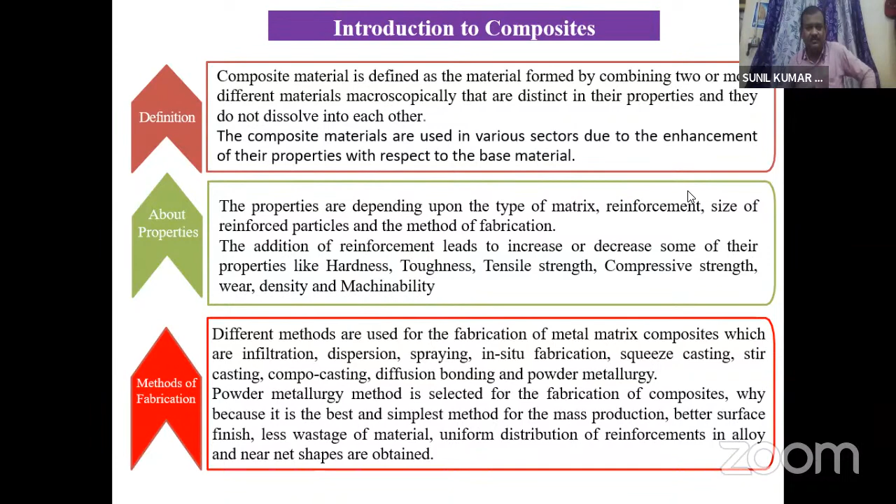Coming to types of composites, composite materials are of two types: one is matrix type, second one is reinforcement type. Different types of matrix can be used for the fabrication of composites, such as polymeric matrix, ceramic matrix, and metal matrix.

In polymeric matrix, there are two types: one is thermoplastic and the second one is thermosetting plastic.

Coming to ceramics, various ceramic materials can be used for the fabrication of composites as a matrix material. Some examples are glass, alumina, silica, etc.

Coming to metal matrix, different metals can be used as a matrix. Some examples are aluminium, copper, tin, nickel, etc.

Coming to reinforcement type, three types of reinforcements can be used for the fabrication of composites. One is whisker, which is just like a fiber but a very thin layer, just like hair, and can be used for the fabrication of composites.

Then coming to fiber reinforcement composites. Fibers are of two types: one is continuous type of fiber, and the second one is short fiber. Coming to continuous fiber, based on the arrangement of the fibers, there is unidirectional and bidirectional.

Then coming to short fiber, these are randomly placed, or sometimes in the same line, aligned. So fiber composites are there. After that, particulate - that means particles can be used as a reinforcement. These come under particulate type reinforcement of composite materials.

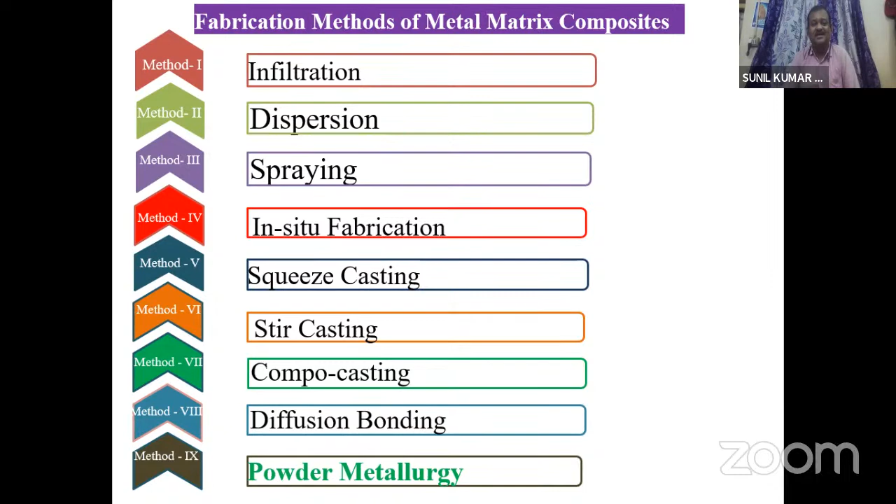Then coming to different methods: first of all, infiltration method, then dispersion method, spraying, in situ fabrication, squeeze casting, stir casting, compo casting, diffusion bonding, powder metallurgy. All these are used for the fabrication of metal matrix composites. Among all these, powder metallurgy is selected for the fabrication of composites.

Then coming to powder metallurgy method. First of all, powders are considered - different metallic powders are considered. It is the science of producing fine powders and then making objects from individual mixed or alloyed metal powders, with or without the inclusion of non-metallic powders. Different metallic powders are considered for the fabrication of composite by the powder metallurgy method.

This method involves producing metallic powders. Different methods are there for the production of metallic powders. Then blending them, which is also known as mixing of powders. After that, pressing or compacting the mixed powders into required shapes, and finally sintering the pressed green compact.

The compacted component is known as green compact. This green compact after compaction will be sintered to improve the properties. The final product in this method - the components are produced in their final shape by pressing the metal powders into the desired shape, then heating the compacted powder for a period of time. For different materials, we are going to use different temperatures.

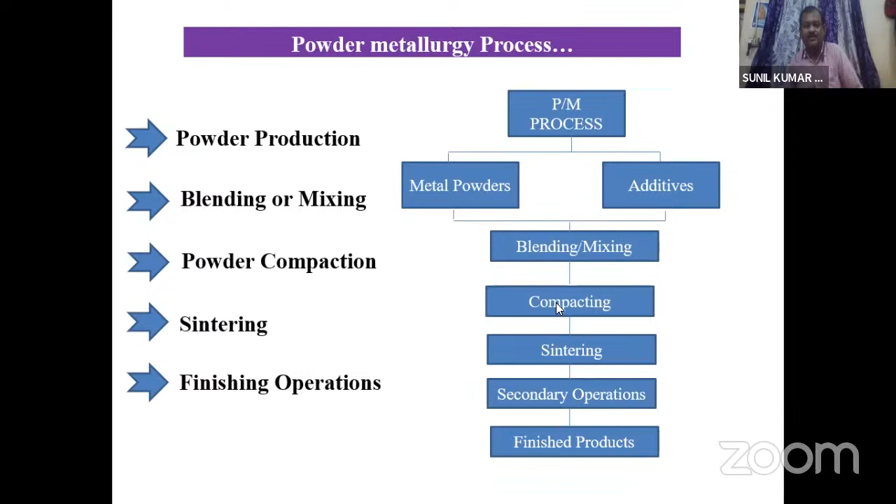Coming to the powder metallurgy process, first of all we have to concentrate on powder production. We produce powders by using different methods. Then this powder will be characterized, because size and shape of the particles may influence the final properties. Hence, the powder will be characterized to know size and shape.

With these powders, we are going to use a powder metallurgy method. In this process, blending is taking place. After that, compacting the blended powder, then sintering is taking place. Then forging and hot pressing are the secondary operations. After that, the final product will be obtained.

We are going to find the properties of the final product. Density or porosity, ductility, strength, and other properties can be found by using different experiments.

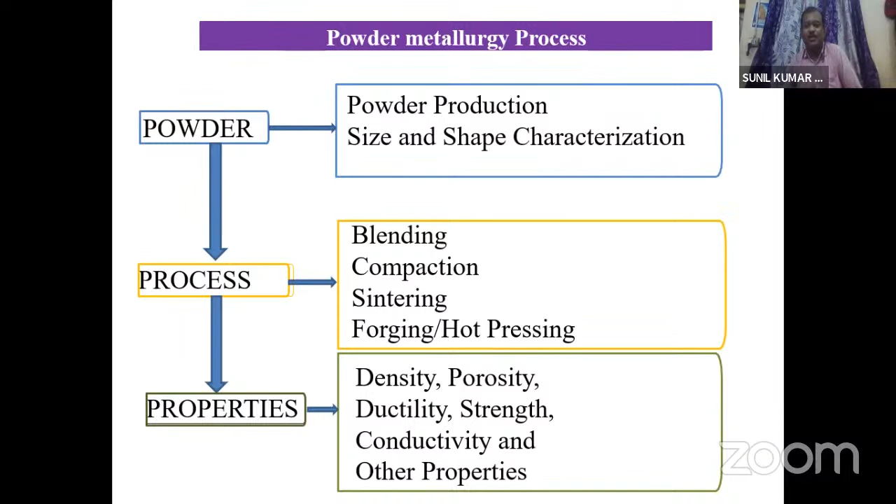Coming to methods of metallic powder preparation, we are going to produce different metallic powders. Nowadays there is no need to produce them; they are already available in our market. Online we can order these powders directly and get them. There is no need of producing metallic powders, but to know the methods of producing powders, these are the methods to produce metallic powders.

First of all, mechanical pulverization. In this, by machining, that means simple filing, we can produce different metallic powders. Then crushing, milling, grinding, etc. By using this, we can produce metallic powders.

Then atomization is also a process. Molten metal, if it is cooled, will be converted into different particles. Then electrolysis, chemical reactions, and shotting. These are the methods to produce metallic powders, but nowadays these methods are not required.

Coming to blending or mixing metallic powders: the process of blending and mixing the metallic powders in a required proportion. We are going to consider some proportions, and based on these proportions, the final product will give us the desired properties.

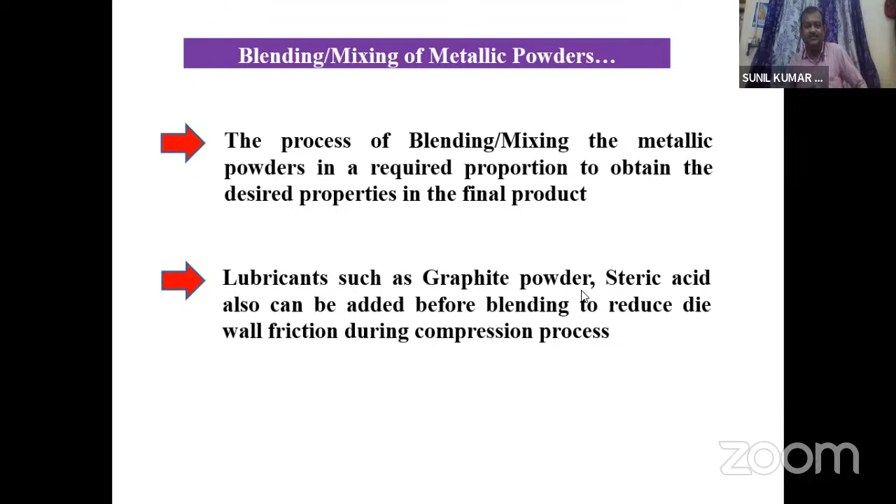Coming to blending or mixing of metallic powders, different methods are there. Among them, ball milling can be used for blending, or a mortar with a pestle can be used. Then an ordinary lathe can also be used for blending and mixing.

In this ball milling machine, inside there is a cylindrical chamber. This may be a tungsten carbide chamber, or sometimes a chromium chamber. Inside that, we are going to pour the blended powder, which we have taken proportionately, into the crucible in the cylindrical chamber. This cylindrical chamber is fixed inside the ball milling machine.

Once it is operated, balls are also included inside the chamber. Steel, chromium, or sometimes tungsten carbide balls can be used. Based on the chamber, we are going to consider different types of balls.

Once it is operated, because of this movement, the balls will collide. Because of the collision, the material will be blended. This will be operated only for a few minutes, 10 to 15 minutes, and that is sufficient.

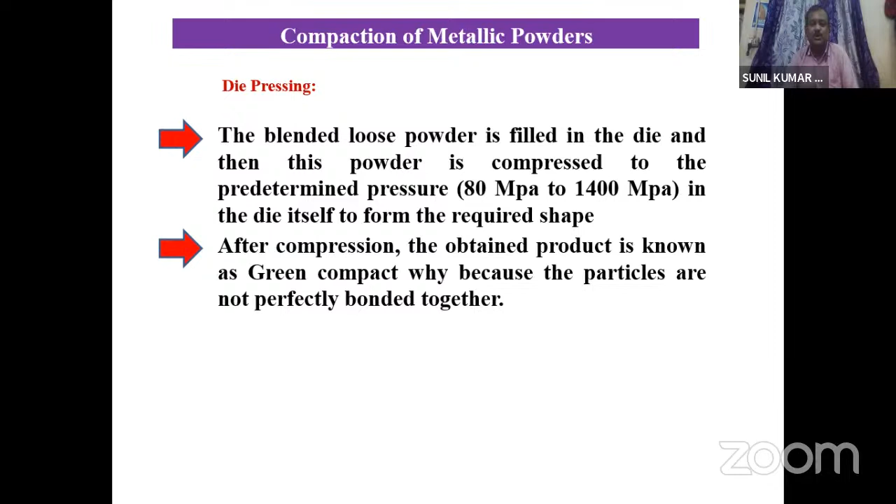So there is no bonding between the particles, hence there is no strength of that component. So to improve that, we are going for the next operation.

Then, by using the upper punch, we are going to apply force. Then this will be compacted. Then this will be ejected by using the lower punch.

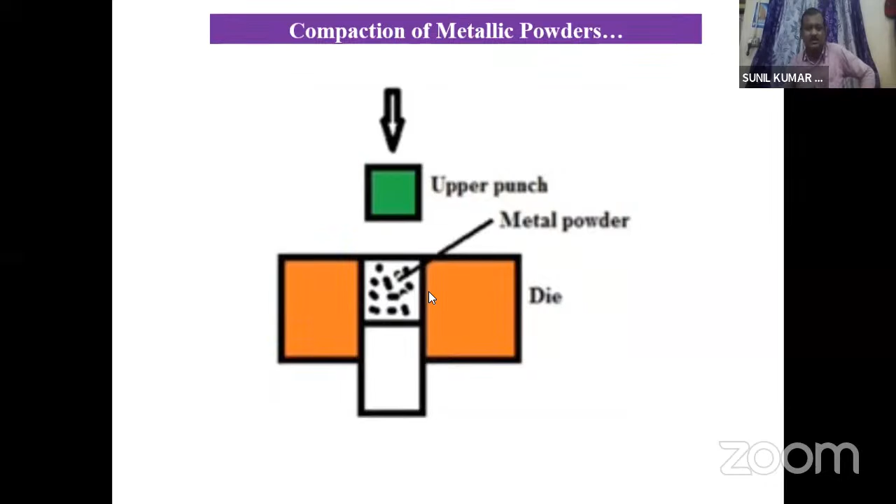After compaction, the next process is sintering. In sintering there are two categories: one is pre-sintering, and the second one is final sintering. Final sintering leads to the final product.

Pre-sintering means before going to final sintering, we pre-sinter the component. This process is continued only whenever machining of the component is required. If there is no need of machining, there is no need of pre-sintering. So if we are going for the machining operation, then only we go for the pre-sintering process.

So what is pre-sintering? It is an intermediate process generally undertaken before the sintering operation to facilitate some unavoidable machining activities. Before the actual sintering process, pre-sintering is carried out whenever the part requires a machining operation. When we are going for machining, pre-sintering is compulsory; otherwise, there is no need of pre-sintering.

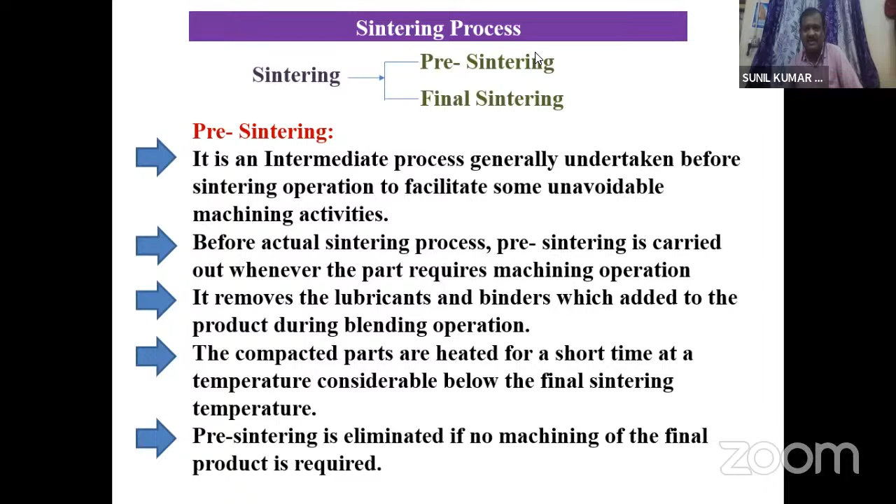Then it removes the lubricants and binders which were added to the product during the blending operation. The compacted parts are heated for a short time at a temperature considered below the final sintering temperature. So the final sintering temperature differs from the pre-sintering temperature; pre-sintering temperature is always below the final sintering temperature.

Then coming to final sintering. Sintering consists of heating the pressed or compacted component, also known as the green component, to a temperature below the melting point of the major constituent. Once you are using 2 or 3 metallic powders, the sintering temperature is based on the major constituent of these. It requires an inert atmosphere to avoid oxidation during the process. The properties of the final component depend upon sintering time, sintering temperature, heating rate, and cooling rate. Most metals are sintered at 70% or 80% of the melting temperature of the major constituent.

Then coming to the sintering temperature and time table. Here different metallic powders are listed, with sintering temperatures chosen according to the type of metallic powder, along with the corresponding sintering time.

First, aluminum alloys: sintering temperature varies from 370 to 570 degrees centigrade, and sintering time is 24 hours. Then for copper, brass, and bronze, sintering temperature varies from 700 to 900 degrees centigrade, and sintering time is only 30 minutes.

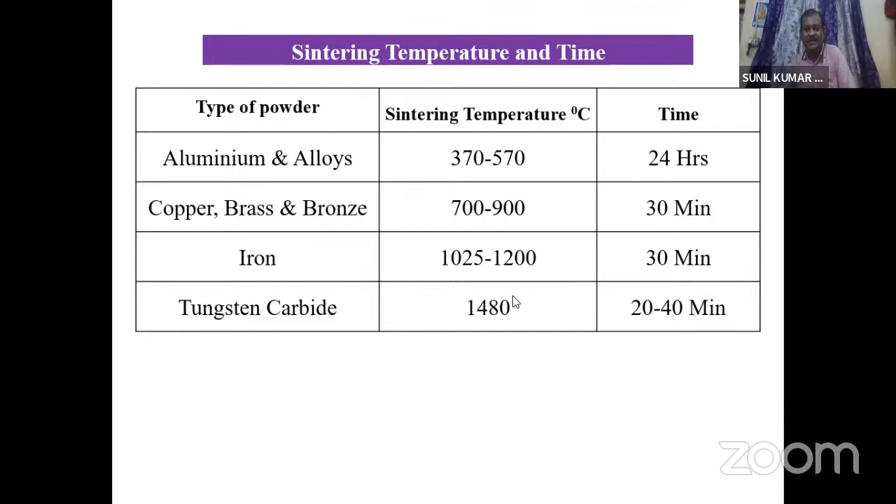Then coming to finishing operations, or secondary operations. After sintering, the final product is obtained. Because of the use of some binders or additives, these components are porous. So to enhance the properties of the final component, we go for finishing operations or secondary operations. In most cases, sintered components are directly used for various applications, but whenever super surface finish, tolerance, or metal structure is desired, the sintered parts are subjected to secondary operations.

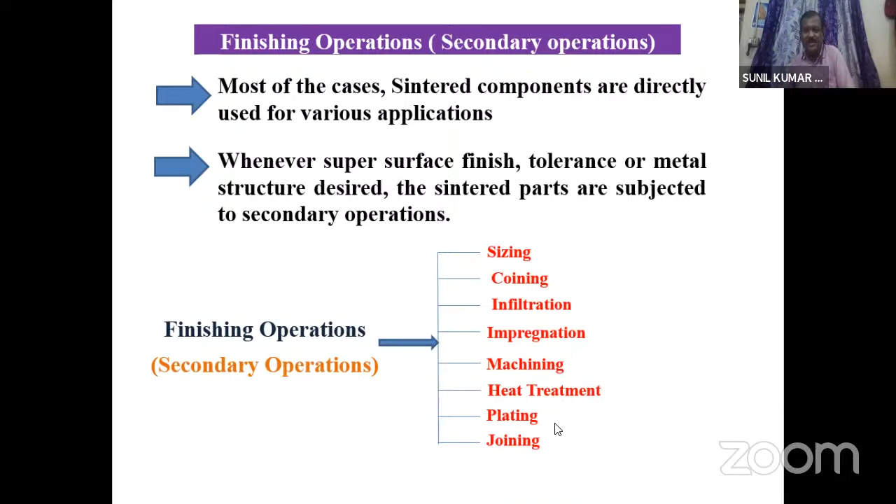So these are the secondary operations: sizing, coining, infiltration, impregnation, machining, heat treatment, plating, etc.

So these are the advantages of powder metallurgy. Metals and alloys can be mixed in any proportion, so you can mix reinforcement in any proportion to give desired properties. Metals and non-metals can also be mixed in any proportion. Parts have good surface finish, so machining is eliminated. Porous parts can be produced that could not be made in any other way. No material is wasted as scrap because the process utilizes 100% of the raw material. Super hard cutting tool bits, diamond impregnation tools, and tungsten carbides are made possible by this method. Labor cost is low, production rate is high, and so on.

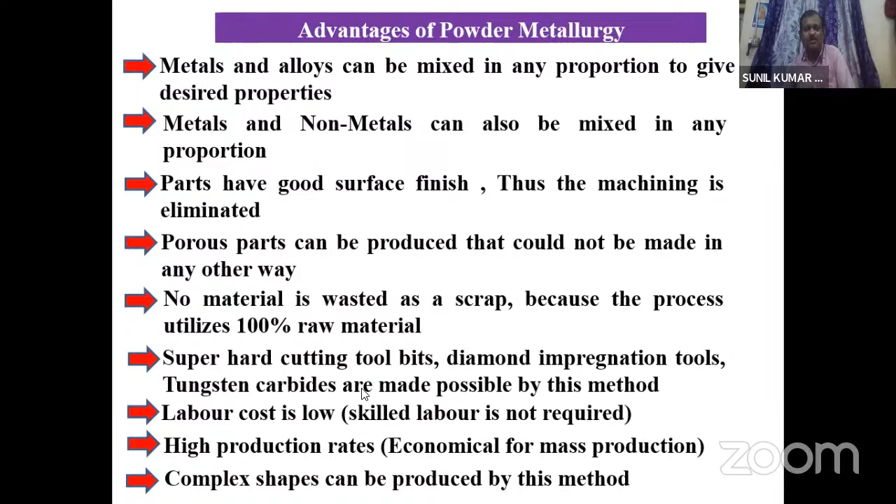So these are the applications. Porous permeable parts like self-lubricating bearings, filters, porous plugs, pressure and flow regulators can be fabricated by this method. Also composite parts with refractory metals like tungsten, molybdenum, which cannot be made by melting or casting.

Tungsten filament is a very small and super hard part which cannot be machined conventionally. Complex and intricate parts like small gears, cams, levers, sprockets, etc. can be fabricated using this powder metallurgy method. Friction materials like clutch plates, brake linings, etc. can also be fabricated using this method.

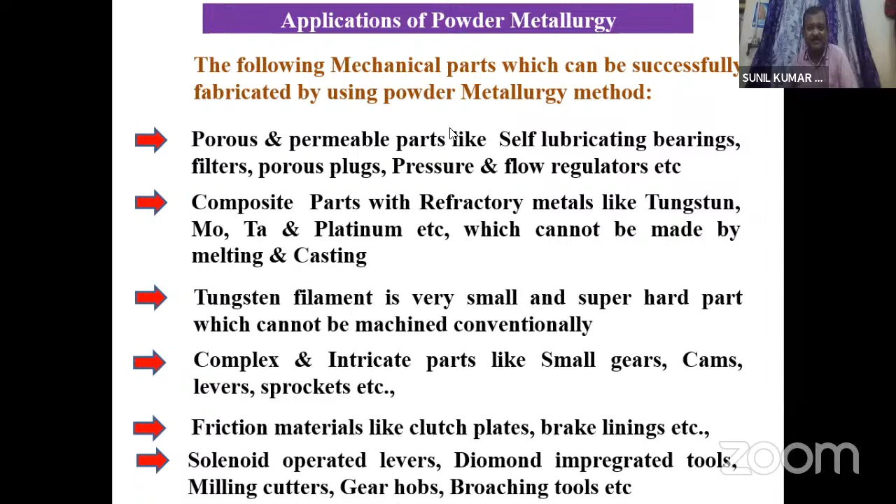Coming to the powder metallurgy process, I am going to consider one problem, already fabricated by our students. This is one example problem related to powder metallurgy, a fabrication method: fabrication of aluminum 2024 B4C.

This is an MMC, and aluminum 2024 graphite. Here graphite is also used, hence this comes under hybrid metal matrix composite by the powder metallurgy method. This is one example problem fabricated recently.

Coming to experimentation, there are three stages. Stage one is fabrication. Second is characterization of the fabricated composites. Then in the third stage, we are going to find the mechanical properties.

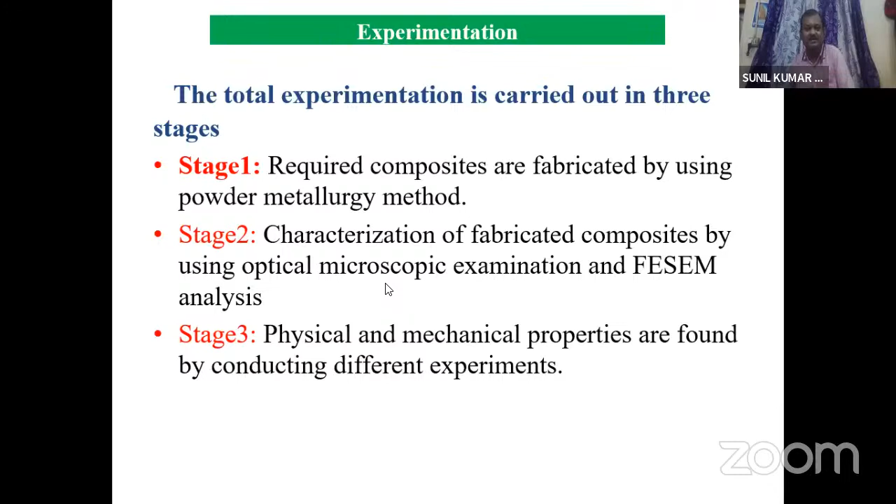Coming to fabrication of composites, three types of materials are used: one is the alloy, and two more metal powders are reinforcements. Powder metallurgy method is selected for the fabrication of both metal matrix composites and hybrid metal matrix composites.

Aluminum 2024 of an average size of 50 microns was selected as the matrix due to its high strength to weight ratio, and it is received from Mumbai. Two types of reinforcements, both with an average grain size of 100 microns, were used for the fabrication of composites: one is B4C powder, also received from Mumbai, and the other is graphite powder, from Amazon India, ordered online.

Coming to the received powders, these are the received powders: aluminum alloy powder, specifically aluminum 2024 alloy powder; second is B4C powder; and this is graphite powder.

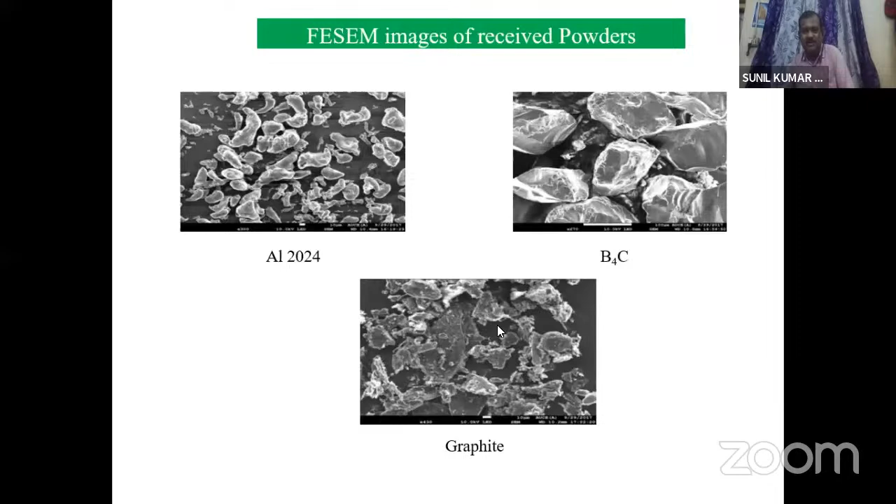FESEM analysis was conducted on these received powders. These are some images of the received powders: aluminum 2024 particles, then B4C, then graphite powder. These are the FESEM images of the received powders.

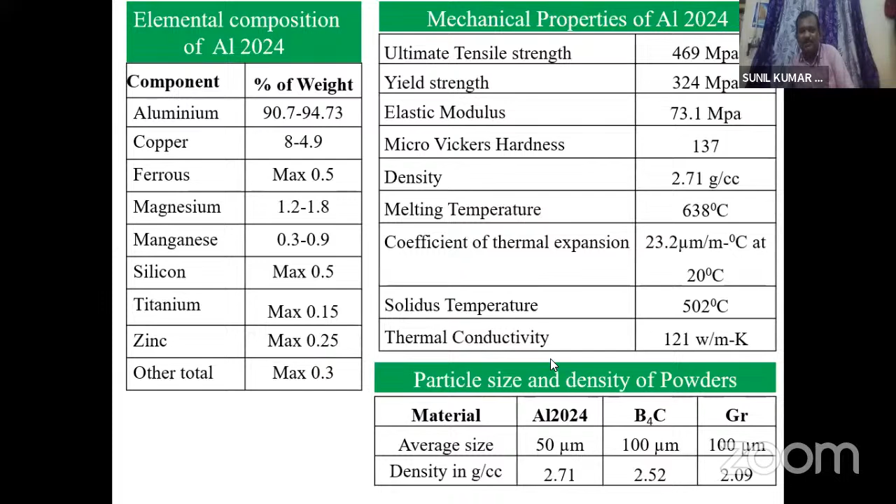Coming to blending of powder: after receiving the powder, these powders are weighed proportionately and blended together. The required quantity of powders for metal matrix composites includes pure aluminum 2024, aluminum with 3% graphite, aluminum with 3% B4C, aluminum with 6% B4C, aluminum with 9% B4C, aluminum with 12% B4C, and aluminum with 15% B4C. These are only the metal matrix composites.

In the second case, another type of composite is fabricated, where graphite is used; hence these come under hybrid metal matrix composites. First, the proportions are taken using a simple balance. By weighing the powders, we use proportionate amounts, which are first mixed or blended in a ball milling machine.

For this ball milling machine, there are parameters which influence the powders. First, milling time: 15 minutes is considered. Next, milling speed: 400 RPM. Milling environment: inert, to keep it cool. Ball to powder ratio: 10 to 1, meaning ball weight is 10 and powder weight is only 1. Using the ball milling machine, these powders are blended together.

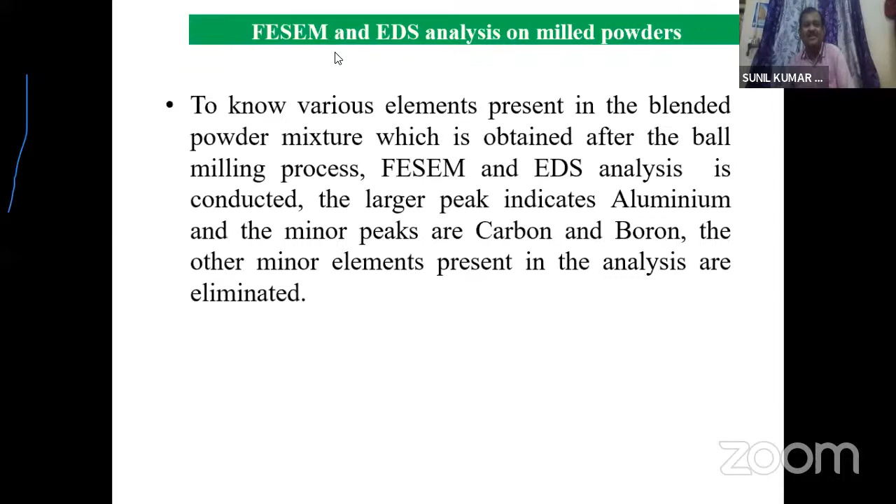So the FESEM and EDS analysis is carried out to know the elemental elements in each and every metallic powder, as well as the FESEM analysis to know the structure of each and every powder, as well as each and every component.

Next, after blending, we are going to compact or press the powder by using a die set. So here the blended powder is compressed at a pressure of 400 MPa by using a compression testing machine. So a hardened steel die with a hole of 15 mm diameter at the center and a punch assembly is used for compaction of the blended powders.

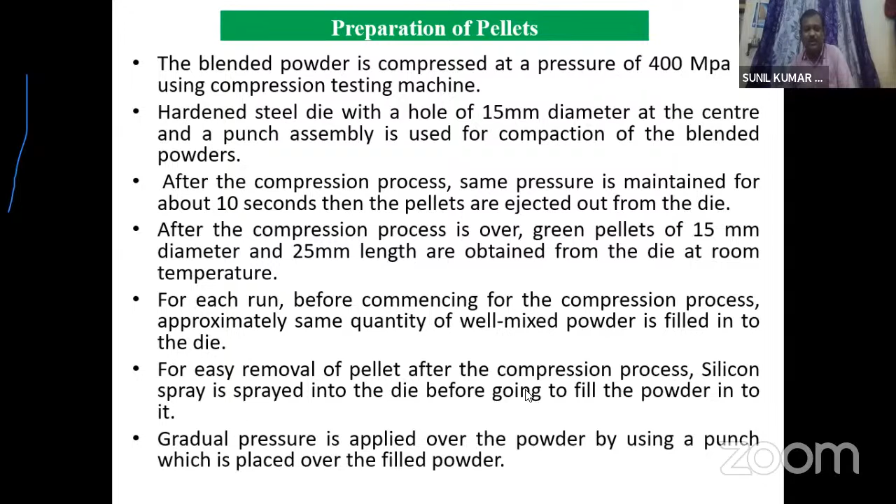For each run, before commencing the compression process, approximately the same quantity of well-mixed powder is filled into the die. For easy removal of pellets after the compression process, silicon spray is used, sprayed into the die before filling the powder, so that gradual pressure is obtained on the powder.

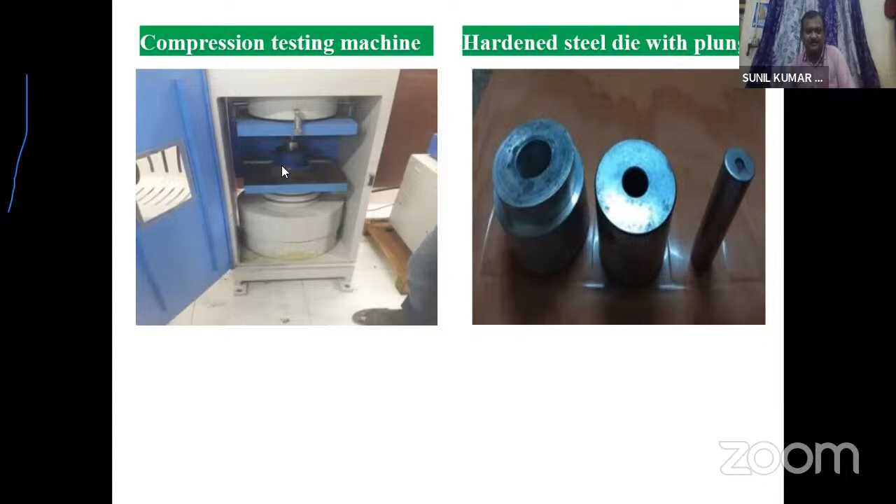After compression, green pellets are obtained. Then these green pellets are sintered. This sintering process includes heating of the component, and because of this heating, the grain structure or bonding between metals may take place.

The sintering process involves heating the samples in a controlled and inert atmosphere, argon gas, to prevent oxides during the process. The pellets are heated up to the bonding temperature and then cooled in the furnace itself.

The sintering process followed the sintering cycle at a rate of temperature increase of 10 degrees per minute, heated up to 520 degrees for about 24 hours, after which the samples are allowed to cool in the furnace itself to reach room temperature. The grain growth and grain bonding between neighboring particles can be achieved by this sintering process. So grain bonding may take place between the different metals only by the sintering process.

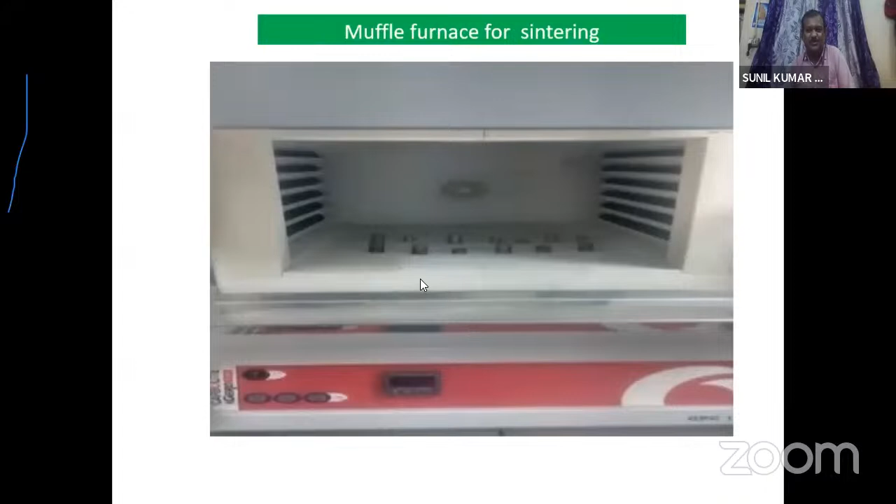So this is the sintering furnace, a muffle furnace used for the sintering process. These are the final products after the sintering process, 15 mm diameter and 25 mm length. These are the final components obtained after the sintering process.

Then after the final products, these components are characterized. Characterization of composites is done by using an optical microscope. Before going to the optical microscope, we prepare the specimens by hand polishing and then go for image analysis.

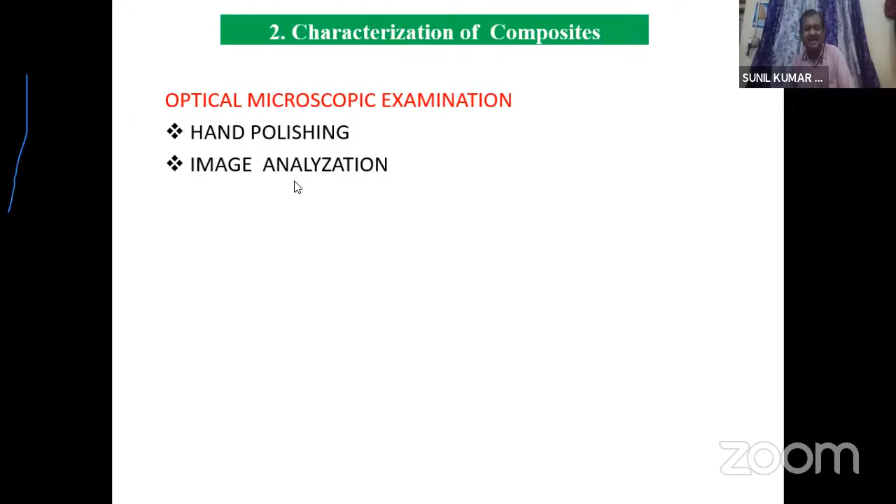Before examining the specimens on the optical microscope and FESEM analysis, the sintered specimens are polished using a disc polishing machine to obtain a mirror-like finish. All the specimens are polished on a standard hand polishing machine using 240, 600, 800 and 1000 grade silicon carbide papers.

Diamond paste is used to obtain a mirror-like surface finish during polishing, to expose the structural features. The polished specimens are etched with Keller's reagent solution. The etch and polish-etch procedure are used to attain a good microstructure.

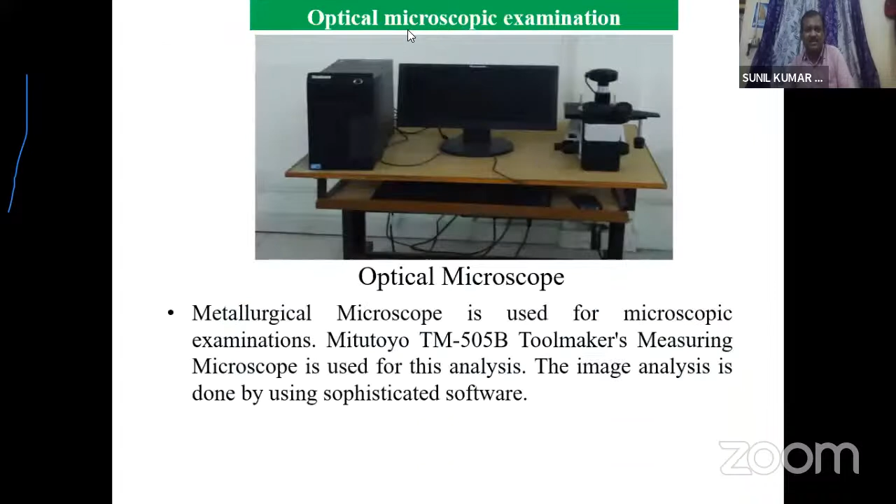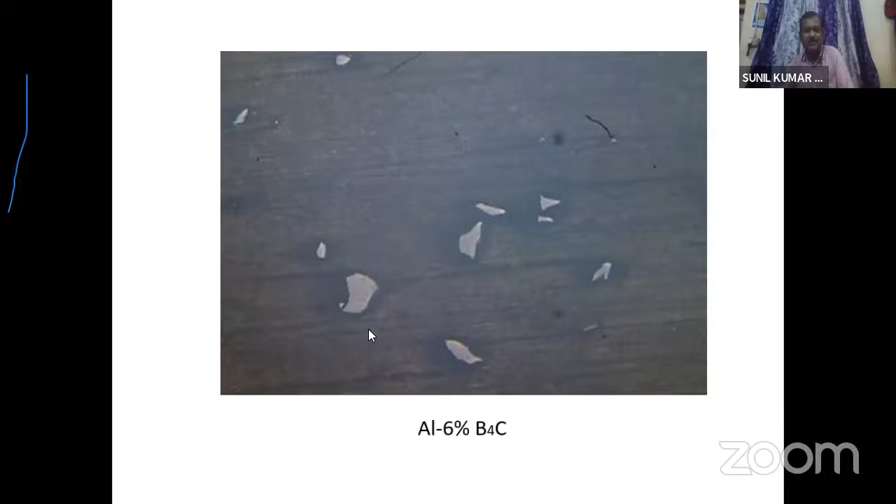Then we are going to increase to 6% B4C. So these are the particles in the alloy. This is aluminum 6% B4C, so these are the B4C particles.

Then coming to FESEM analysis. This will use microstructure. This is for pure aluminum 2024.

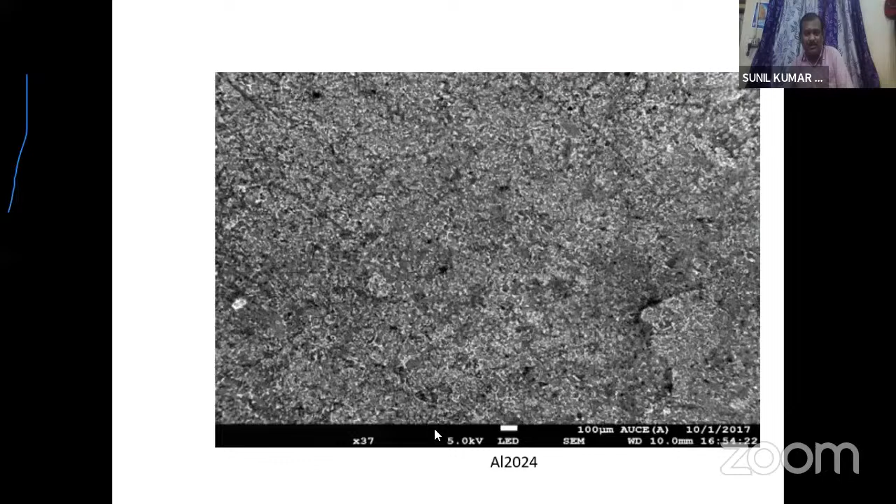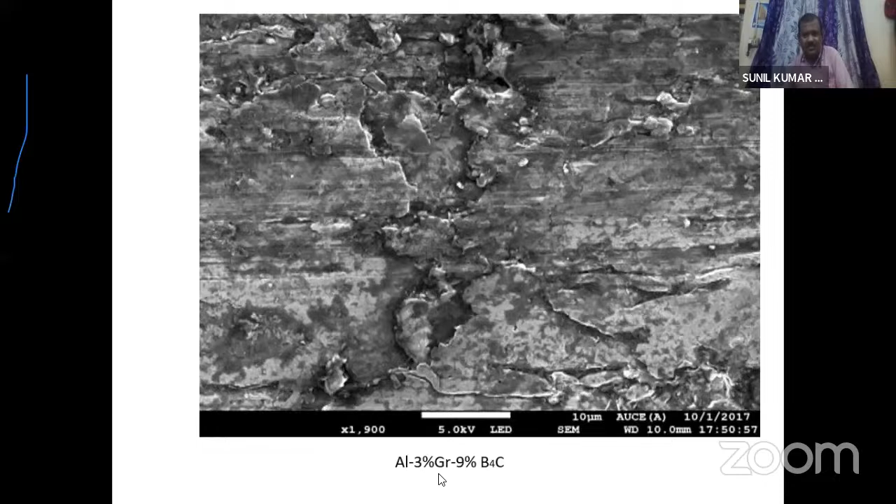So this is 3% graphite to 9% B4C. This is FESEM analysis. Then,

So after microscopic or FESEM analysis, we are going to find different properties. First, we are going to find the density of the produced composites. Density can be calculated using Archimedes principle. This is the equation to find density of the components.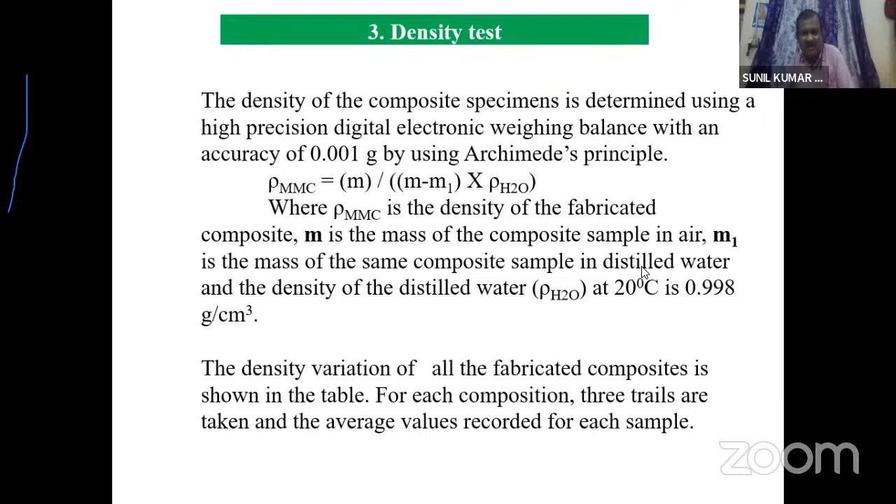Density of metal matrix composite equals... M is for mass of the component in air. M1 stands for same mass in water, distilled water. Then this is the density of distilled water, H2O.

So first of all, this is pure aluminum. Then this is aluminum 3% graphite. Then this is metal matrix composite. So these are related to hybrid metal matrix composite.

Why is it called a hybrid metal matrix composite? Because here we are going to use 3% graphite as well as 3% B4C. Hence these come under hybrid metal matrix composites.

Then this is the density variation of various composites. This is pure aluminum. Once graphite is added, the density suddenly decreases. Why? Because graphite is a less dense material.

Then if you are adding B4C, there is an increase in the density. Then if you keep increasing the B4C content, the density of the composites decreases. This is related to only metal matrix composite.

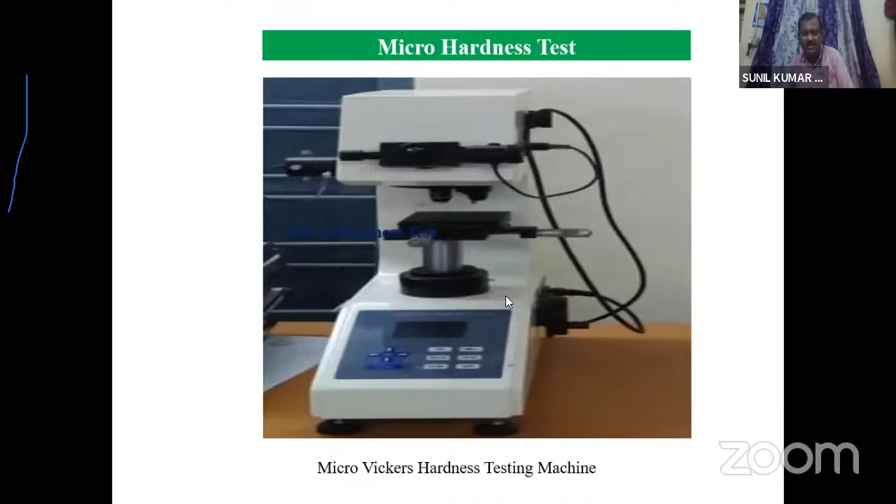Then coming to micro hardness test. This is the micro hardness test. For aluminum 2024, two directions are taken, two values for each and every specimen.

Then coming to hardness values, these are shown in a bar graph. Here also, blue indicates 0% graphite, and red color indicates the presence of graphite at 3%. These are the hardness values: 138.95, then 144 hardness increases, then 148, then 154. So these hardness values increase.

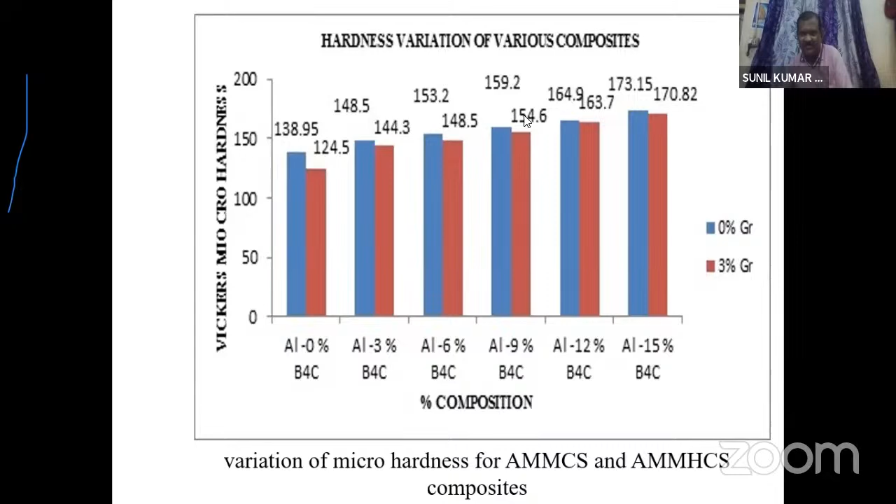Coming to the conclusion of my work, aluminum graphite B4C hybrid metal matrix composites are successfully fabricated using powder metallurgy technique. The microscopic examination shows the presence of reinforced particles in aluminum alloy, and uniform distribution of particles throughout the alloy. The density of the hybrid composite is less, due to the use of less dense reinforcements B4C and graphite compared with aluminum 2024.

The density of these fabricated composites decreases with increase in percentage of B4C. The micro Vickers hardness of both fabricated metal matrix composite and hybrid metal matrix composites improved compared with the base alloy, but there is a drop in micro hardness for hybrid composite due to the presence of graphite.

Coming to future work and future scope: powder metallurgy produced composites have less tensile and corrosive properties when compared with other methods. Hence, secondary operations like extrusion, coining, sizing, cold forging, and hot forging may result in increase of all the properties. The particle size also influences the properties of the composites.

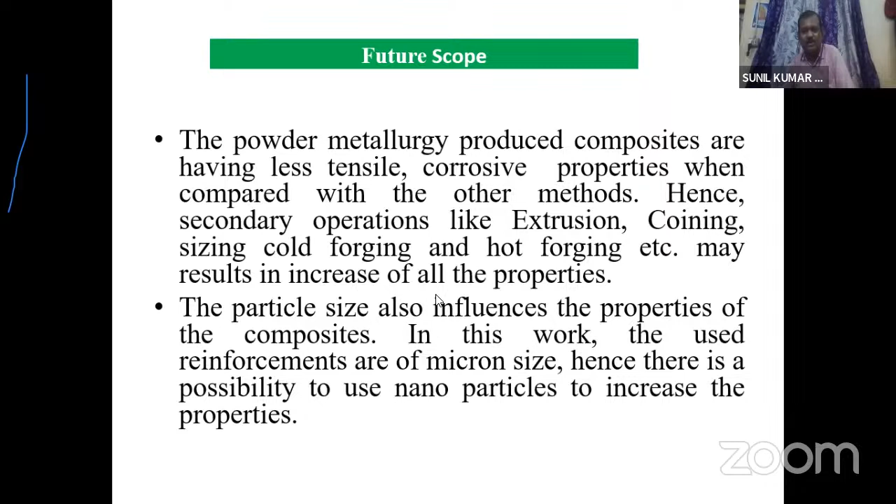In this work, the reinforcements used are micron size. Hence, there is a possibility to use nanoparticles to improve all the properties. So, thank you one and all.

Hello. Hello, hello. Hello. Thank you, sir. Now, participants, you can unmute yourself and ask queries. Hello, sir, good evening. Sir, audible? Audible, okay sir, audible.

Audible, okay sir. I am Dr. Ismail, sir. Okay sir, nice meeting you sir. So regarding the selection of B4C percentage variation and percentage variation with graphite, on what basis did you select this composition?

Sir, graphite is considered only because once you use graphite powder, the products become self-lubricated, sir. I am listening, but my doubt is about the selection of the proportion, nothing but 3% of B4C to 6%, to obtain self-lubricated component property, sir.

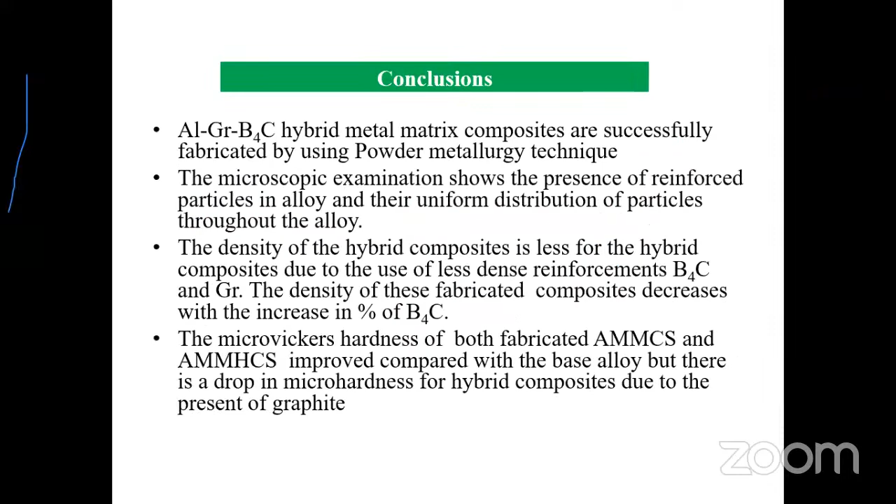Yes sir, go to the next step. So you can see this, sir - percent of composites like 0%. When adding B4C at 0%, you can observe a drastic change on the y-axis, where density has been noticed. So when you add a little quantity of graphite, a huge variation in density is noticed. This is the density graph, sir.

So coming to this hardness picture, sir - micro hardness also, you can adjust the scale. Because of scaling only we are getting the maximum value, so 2.7 - this is only 2.7, this is only 2.63, sir. So all these are nearer values, sir.

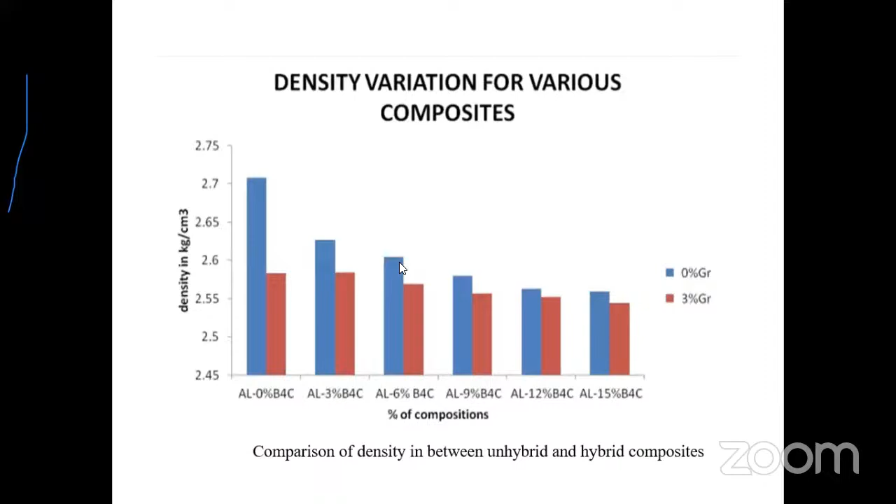But whenever we add the secondary reinforcement, we also calculate the density - graphite density and B4C density are both considered. When it comes to the maximum 15% B4C composite, the density will be a little bit lower compared with the pure alloy.

Sir, we are fixing the graphite powder at only 3%, sir. We are going to vary B4C powder from 3% to 6% to 9%, whereas graphite is always constant at only 3%, sir.

Okay sir, when it comes to the optical microscopic value, what magnification did you select for taking the images? Sir, the optical microscopic value, I don't know sir, because our students know about this, sir. Okay sir, thank you, thank you sir.

Sir, any queries, sir? So thank you, sir. No queries. Thank you so much, sir.

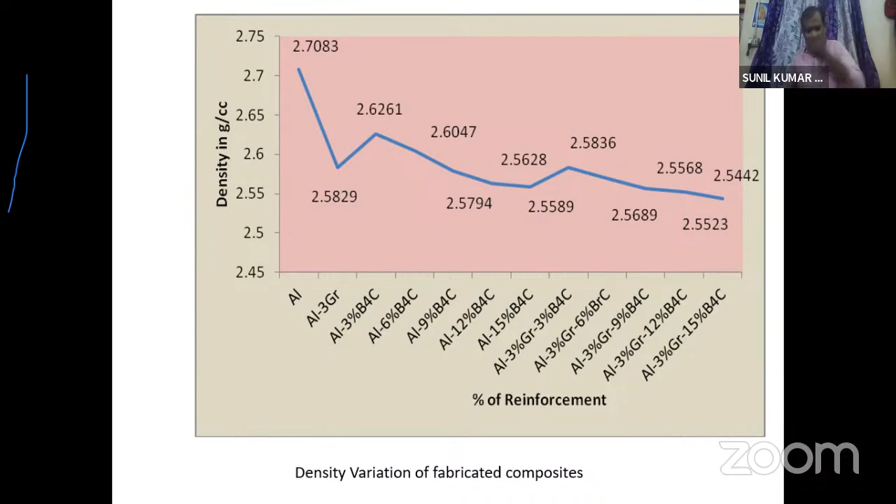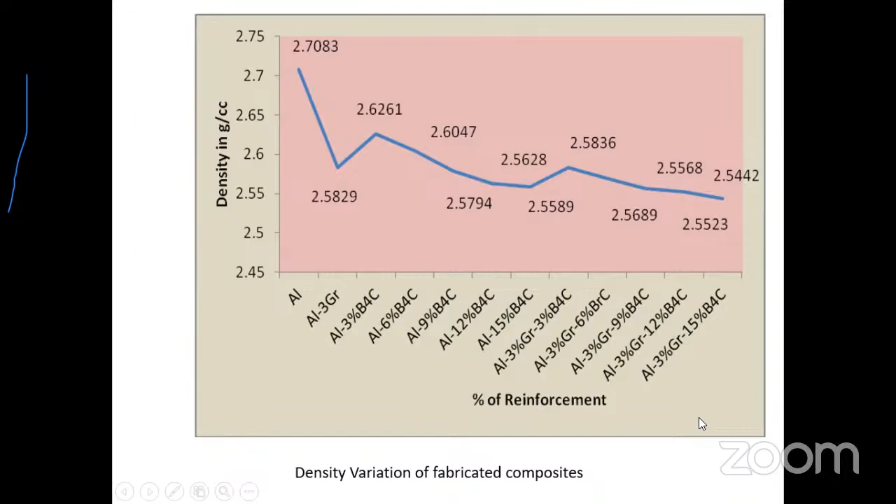Good evening, friends. Is it audible? Dr. Francis, is it audible? Yes, sir. Good evening, sir. Audible, sir. Shall we start, sir? Yes, I'm ready. The slides are running, only one thing you can confirm with me. One minute. Make it full screen, sir. One minute. It's not opening. Sir, you can log out and share again. Log out, I can log in, right? I don't know what's happening. It's not sharing also. I'm leaving the meeting and will join, share and try again, sir. Yes, sir. Now it's coming. That's it. It's visible. Fine, sir, let's start. The slides are moving. Yes, sir, it's moving. Okay, then you can start.

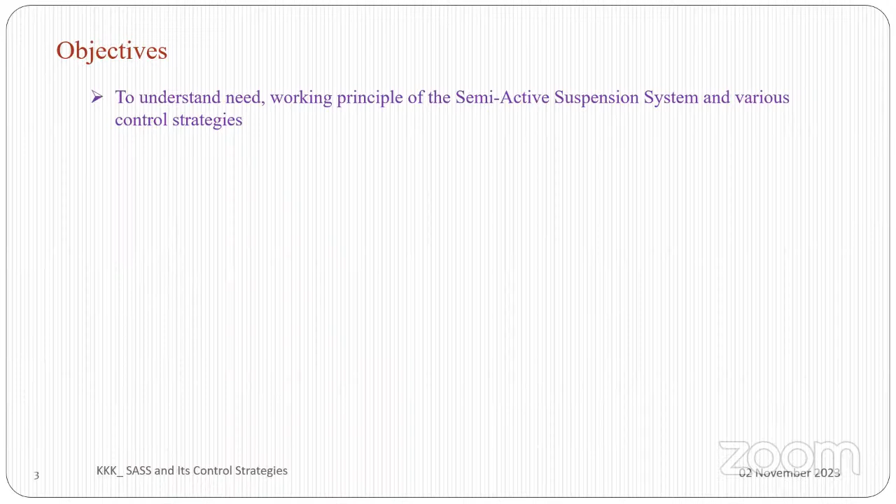Especially, I belong to automobile engineering. My PhD topic is semi-active suspension systems, which is a compromise between a full active and passive suspension system. You already know that for vehicle performance and handling, 3 components are very important: steering, braking, and suspension system. For suspension, I don't want to dwell too much on the presentation — I'll just run through it. This particular slide is a very important one.

We always look for 2 things: one is ride comfort, and another one is... one minute.

One is ride comfort, another is vehicle stability. The problem is if I have low damping, or soft suspension, soft spring, I get good ride comfort, no problem. But if I have a hard spring, I get good vehicle stability. So there's a trade-off between ride comfort and vehicle stability. I cannot achieve both using the same spring and same damping. I have to do some compromise in this particular area. So what compromise do I do? How can I get it? That is a bigger task for automotive engineers.

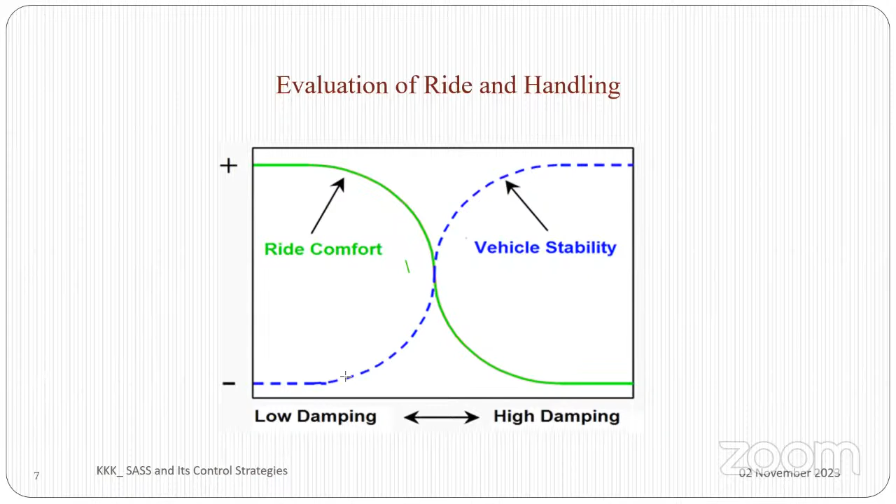Not moving. Sorry, it's not moving. 1 minute. It's visible.

Right, so I have to look for this one. Classification of suspension system: there are 3 kinds of suspension systems. One is passive, number 2 is semi-active, and the third one is full active. In a passive suspension system, the damping characteristics are very constant, so we cannot adjust it. That's a bigger problem with passive. If we go for a full active suspension system, everything can be adjusted.

Using actuators. Hello, it's audible? Your screen is in the first slide. I don't know what I do. Stop sharing. I have done a stop sharing. See, share screen. Now it's okay. It's visible. Slide Yes, number sir. 8.

So for full active, we have this actuator, so we get good suspension ride and comfort as well as vehicle handling. But the penalty is we have to spend 10% of total output of the engine. That's a bigger problem, that's the reason people are moving to semi-active suspension systems, where we have a few car models. I'm not going into that, I'm just looking at this one, semi-active only.

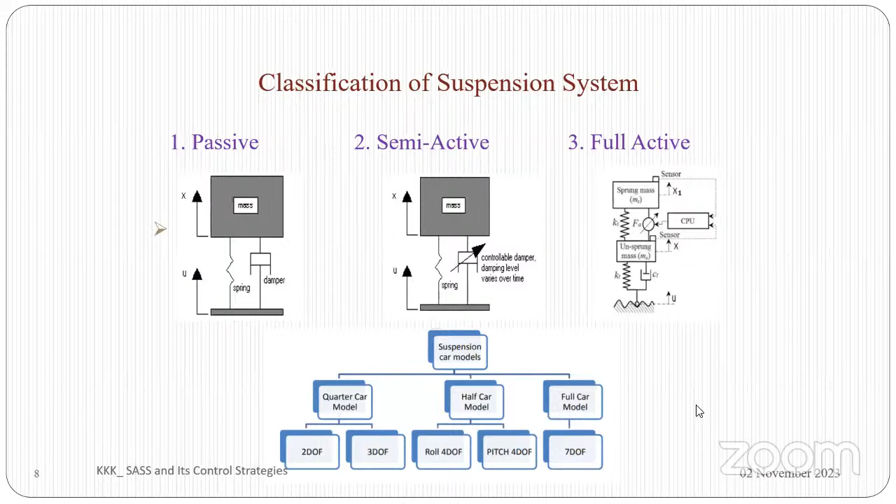Okay, so I am talking about the Magneto fluid, where rheology is a characteristic where external disturbances are given to a system. What is an external disturbance? It may be a stress, a strain, a temperature variation, a magnetic flux, a variation in current, or a variation in voltage. So all of these are disturbances on the system. When the system gets disturbed, its original characteristics get changed.

So here what we are looking for is the changing of damping characteristics. That means it's a Newtonian fluid. Normally the MR fluids are called a non-Newtonian fluid. Initially, when current is not given, it acts as a normal fluid. When current supply is given, it becomes a non-Newtonian fluid.

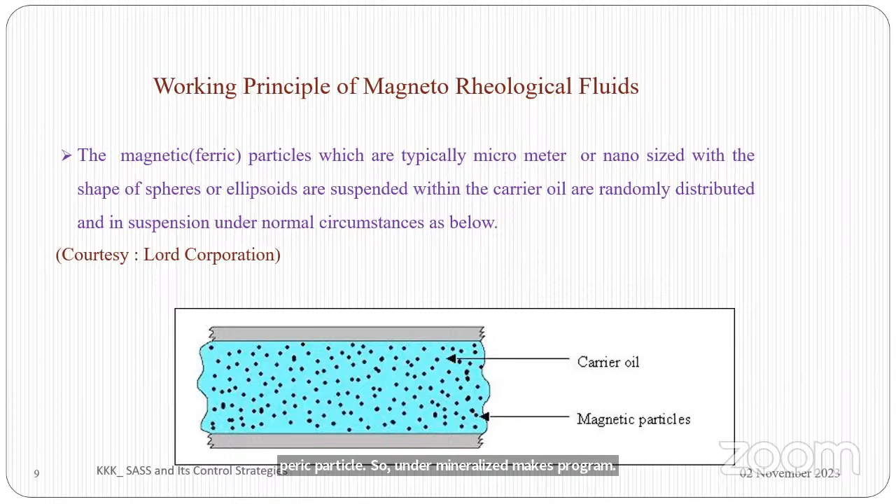What happened when this system has been disturbed? How it can disturb? We are this slide is running, Francis. I am in 10th slide. Francis, slides are running. Hello, Francis, are you there? Yes, sir. Yes, sir. Yes. Okay. So now what happened?

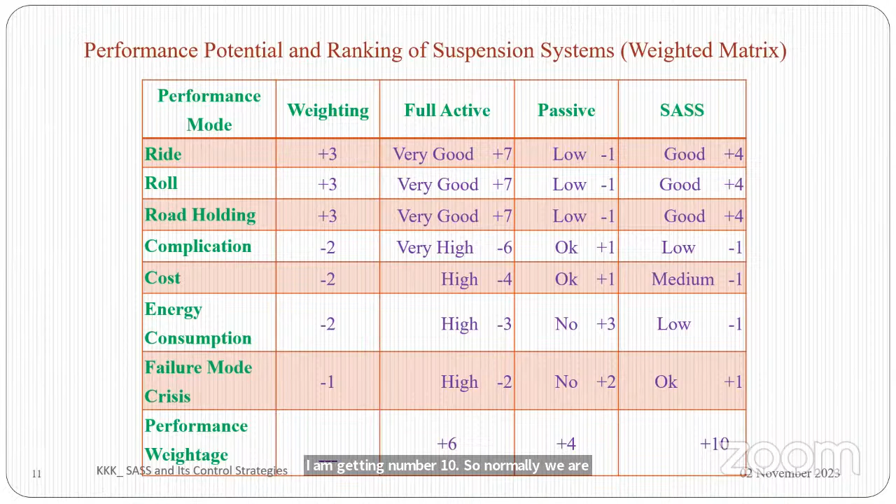But for cost and energy consumption, it's very low. You can even use a small 12 volt battery, give a supply, and the damper gets actuated, right? So finally, for performance weightage, I am giving number 10. Normally we select this particular damper for automotive applications.

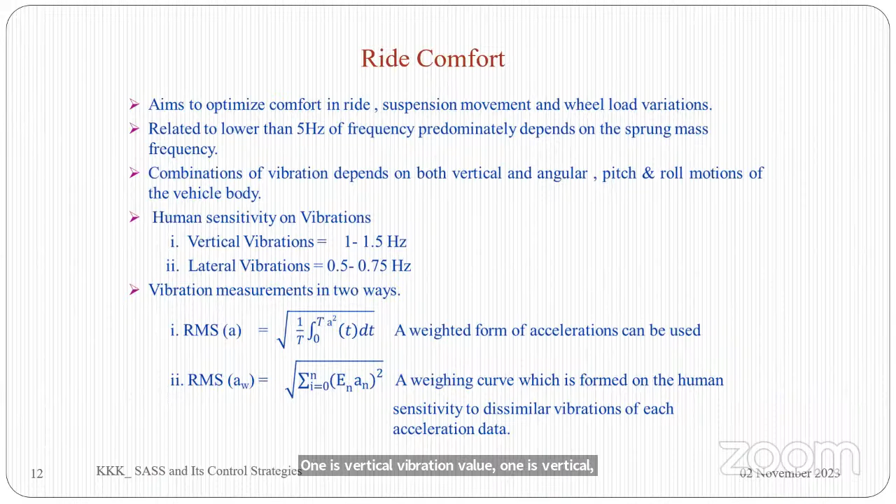These are some other important characteristics for ride comfort. We have to look at vertical vibration of 1 to 1.5 Hz and lateral vibrations of 0.5 to 0.75 Hz. If these values go more than 1.5 Hz, it will definitely affect the passengers or occupants inside the car. So you always have to keep values less than these two, vertical vibration and lateral vibrations. The suspension system plays a very important role.

There are two important components: one is called vibration dose value, another is called motion sickness dose value. These are two individual components, but combined they give the input to the system ensuring it doesn't affect the occupants sitting in the car.

Okay, next slide. So how I select a damper is very important. These are the few parameters I look for: one is the load that system should carry, and packages, which is very important in automotive suspension systems. In lower volume, I have to keep the performance damper, that's very important.

And a suitable damping value - that's why I think about the zeta value, and the other value is damping coefficient. Those are two things I have to take care of. This is the third point: how many cycles it's working. Normally people look for 2 million cycles, 20 lakh cycles. So I have to ensure that at 20 lakh cycles, my damper is not getting damaged. I have to give assurance to my end users.

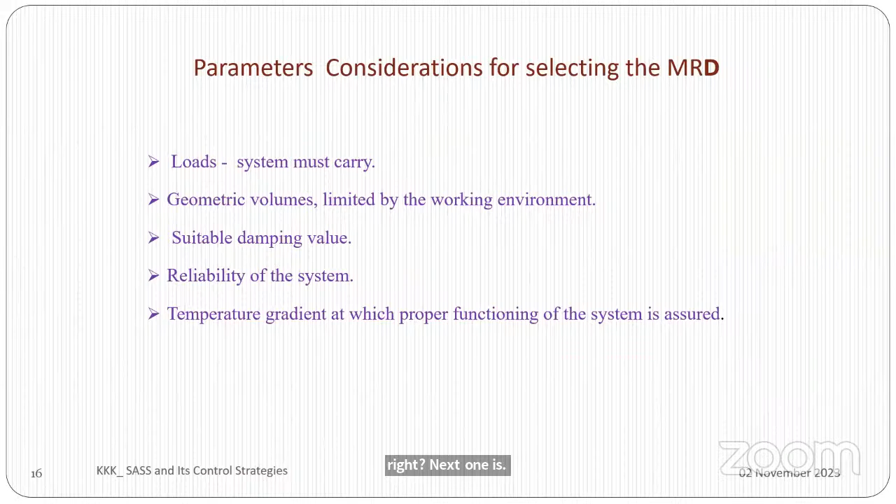Next is the temperature gradient at which proper function of the system is assured. Because the fluid inside has friction with the piston, as it continuously operates, there's too much temperature variation. If there's too much temperature variation, your damping value reduces - damping density gets reduced, viscosity is reduced, so it affects performance characteristics.

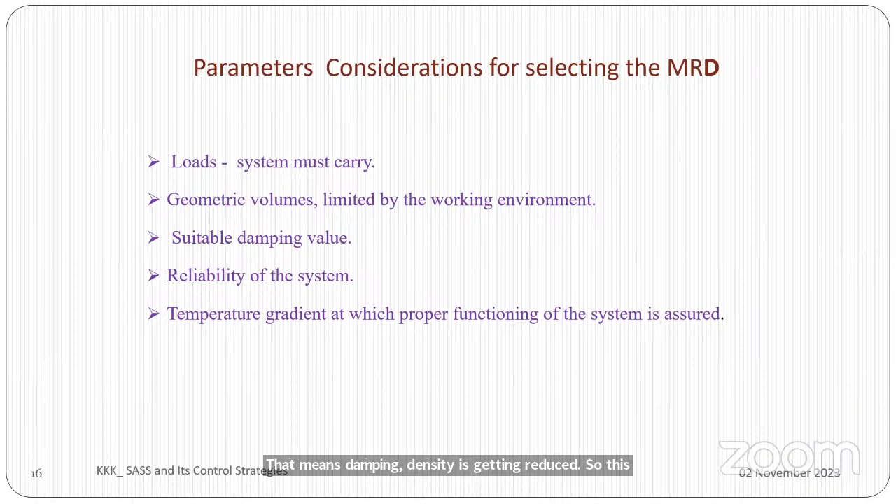We can go to the next slide. This is a particular damper called a long stroke damper. When you see this damper, you have two wires here, positive and negative, and this piston, number 7, is there. In the piston, we provide a copper coil inside with thin copper wire. This copper coil goes through the piston rod area and comes out, and we have two wires, positive and negative.

I give a current input to the two wires using a small ordinary battery. I can operate this damper from 0 amps to 2 amps. At 0 amps, my damper works as a passive damper - there is no influence from the electronic system or magnetic flux. But even giving 0.1 amps, it acts as a semi-active suspension damper.

This particular damper was purchased from Lord Corporation in the US, where I can operate it at 1 amp continuously - I can give a 1 amp current continuously and it works continuously. But if I want to increase a bit more, going to 2 amps current input, I have to use this damper only intermittently. I cannot give that current input continuously.

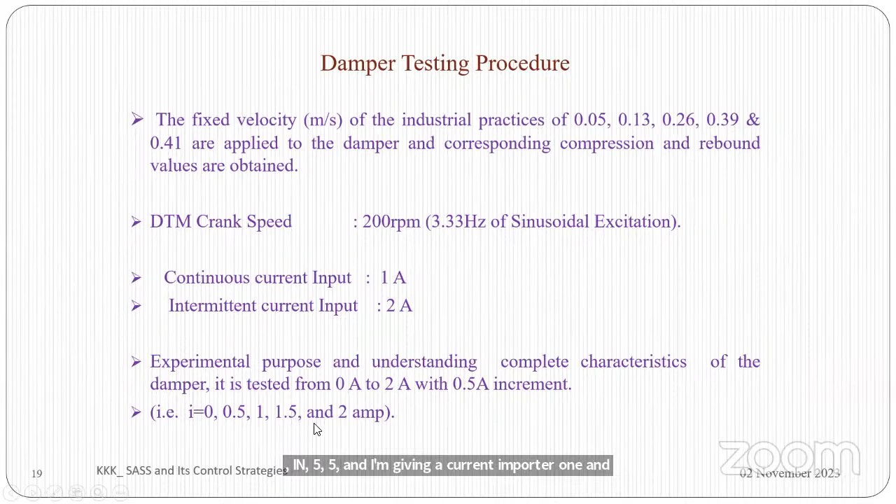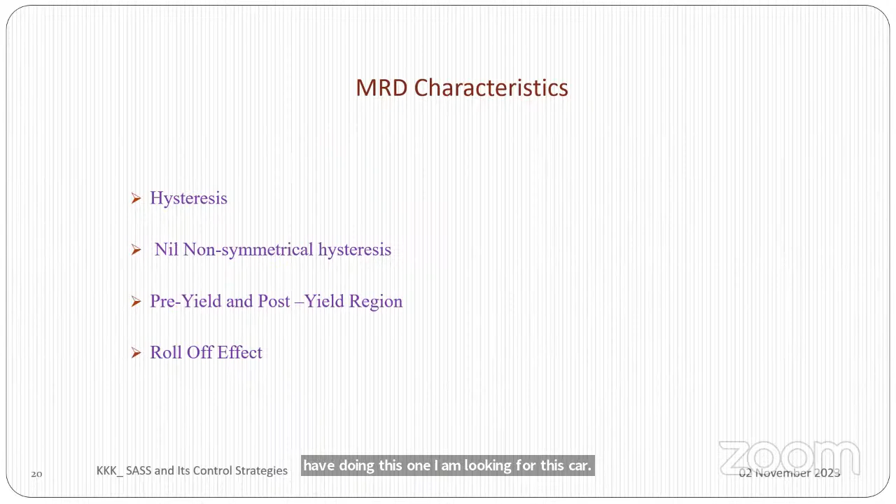So for doing this, I am looking for these characteristics: one is the hysteresis, non-symmetrical hysteresis characteristics, pre-yield and post-yield region, and roll-off effect. These are the 4 things I'm looking for, right?

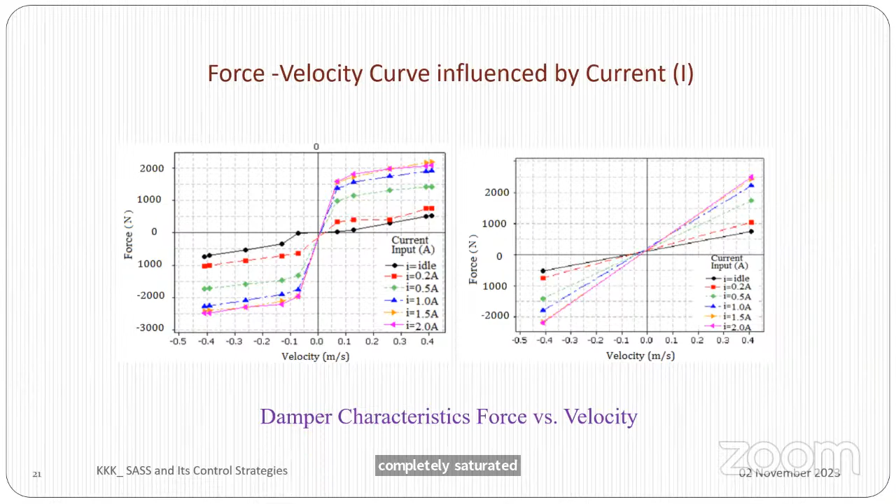So normally my passive damper always has 2600 Newton-second per meter, but I don't want that value - I am only looking for ride comfort. So during ride comfort, I have only 500 Newton-second per meter. But when my vehicle is in a bumpy condition, or it is a pothole, or a bumper, I am giving a current input of 2 amps, and my damping value is getting increased.

You can go to the next slide. So while I am talking about this, I have to give a current input only - if I am giving current input, it will work. That is good. But I have to use some control strategy to change the intensity and other components of the current input. I cannot use an ordinary switch on-off condition. I have to consider some factor, and operate this damping at the precise time - cutoff time is very important, and the timing of current input is another important one, right? So I have to go for some control strategy. I am moving from material science to control strategy now. I am not going too much deeper, but giving glimpses of what's happening in the control system. If you have any queries, you can mail it, or we will discuss during this session if time permits.

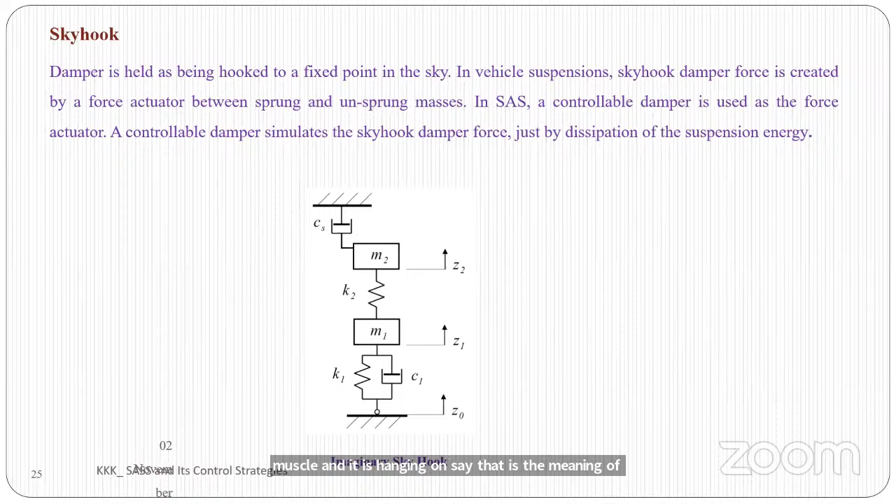So normally what happens - there is something called this particular strategy, invented by Karnopp, K-A-R-N-O-P-P, in 1974, where they consider this is my chassis. I think you are all mechanical people - M2 is called sprung mass, which is nothing but the chassis, and M1 is called unsprung mass, below the chassis. So I can say the spring, axle, tires, everything is called unsprung mass. So what happened - I put this spring and this damper. They consider putting a damper on this sprung mass, and it is hanging on the sky. That is the meaning of this one. But it is not possible - I cannot hang a thing on the sky, right? So what happened - I consider my M2 sprung mass is my sky.

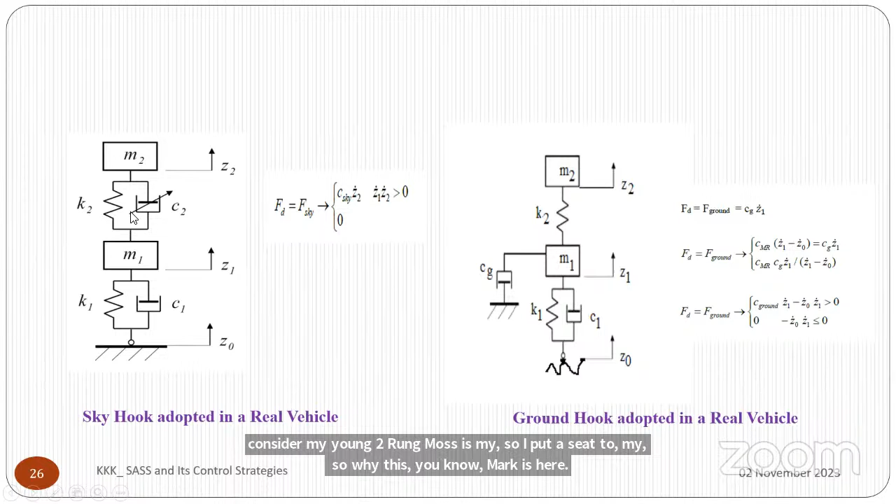So I put a C2, my damper, here. Why is this arrow mark here? This arrow mark means this is called a continuous variable damper, right? You understand - CVD, sometimes called continuous variable damper. That means these damping characteristics are getting changed continuously. How is this working? When there is a change in relation between Z0, which is the road profile value - when Z0 value gets increased, what will happen? Z1 value also gets increased. There is a displacement, so Z2 value is increased. So they put two sensors between Z2 and Z1.

It is an infrared sensor - normally they will put a simple sensor. So when Z2 and Z1 are coming closer, what happens? Nothing happens - my spring is only getting compressed, but when Z1 and Z2 are going away from each other, during that time, I have to give a current input to the system, and my system is getting working. This is called a skyhook system, where if I'm using skyhook, the merit of the system is I get a good ride comfort - I'm not having a problem in ride comfort, right?

But what happens with groundhook? Now I put this one on the groundhook, where if I'm using this one, my unsprung mass vibration is very good, but my sprung mass vibration is a big problem. So unsprung mass is very good means what will happen?

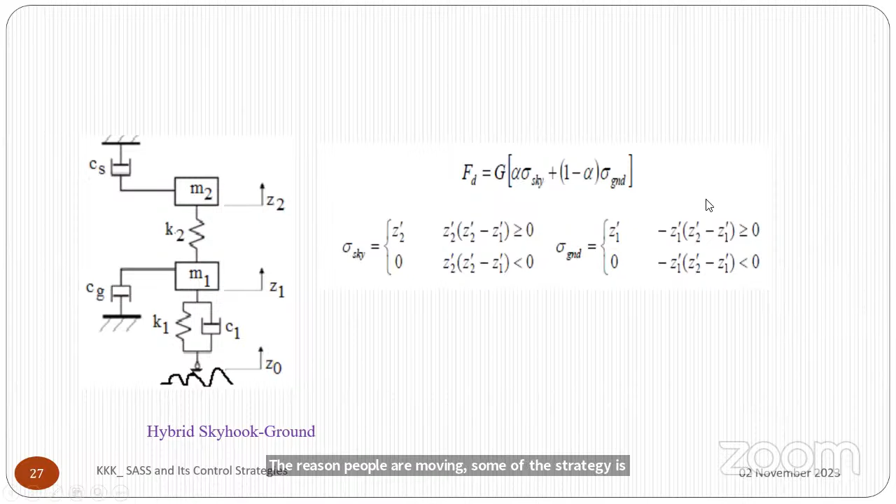The reason people are going for some other strategy is called skyhook strategy, hybrid skyhook strategy, where alpha makes a very important component. Sigma sky is skyhook, sigma ground is G, N, D is ground. So what happened, alpha value is 1. I put alpha value 1 in this particular equation. What will happen? This 1 minus alpha and ground becomes 0. So this is 1 into alpha sigma sky. I get a damping coefficient of skyhook damping.

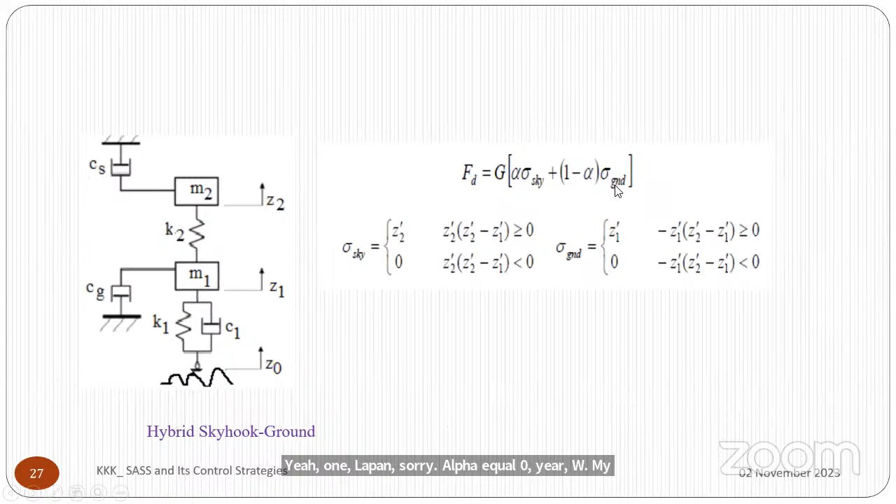In other case, I put alpha equal to 0. What will happen? My sigma sky will diminish. My sigma ground will be good. So I get a good unsprung mass vibration. This is how it is working.

But the problem with this particular hybrid skyhook suspension system is that switching is a bigger problem. So I am not getting good ride comfort. Even though I put a lot of effort into getting this, I am having problem not getting ride comfort. So people are not using this one.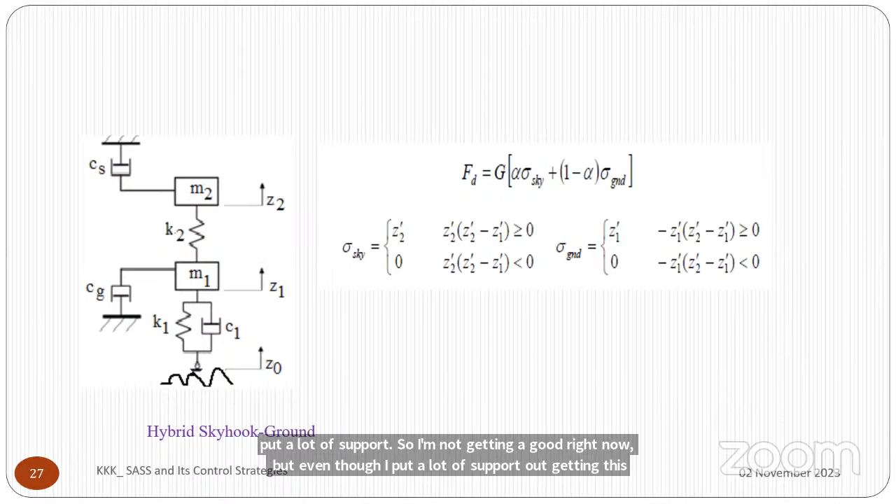They will go for some other system called skyhook on-off strategy. Here, very important thing of this skyhook on-off control strategy is the simplification. There is no complicated controller components. I'm having only 2 sensors, that is enough for me, and I am having 2 levels of damping.

One is I equal to 0. I equal to 0 means it is a passive suspension system. I equal to maximum means, say I equal to 2 amps, I am getting maximum damping. I cannot increase I more than 2, because I got already saturation, I cannot increase more. So I can put I equal to 2, for example I'm telling I equal to 2.

But some dampers maybe will give a current input a little bit more. I will tell you another classic example, you check in Google Scholar or somewhere else. We are having some bigger size dampers, having 500 tons dampers also available, 500 to 600 tons dampers available. These dampers are used in multi-story buildings.

So they keep this damper on the ground floor. They keep one eye point on the ground, one eye point on the building. Why are we using this kind of damper? When you are getting small kind of earthquake and things like that, this damper absorbs shocks from the earth. Normally it will absorb shock from the earth and reduces transfer of shock from earth to the building. So check it, many high-story buildings are using this kind of MR dampers.

So this particular damper used gives a lot of support in getting ride comfort as well as vehicle handling. So I am looking for the two things I told you: C high state or C max, maximum damping coefficient value, and C minimum or C low state. These two things I am working on. I am getting it, but still I have some problem in precision controlling of the switches and all the things. So people are using fuzzy logic things.

So I will show one controller system. This particular half-car model is called a roll model. This kind of model is called roll model. What happened?

We are having a few models. One is a quarter car model, where you take one portion of the car. That is called the quarter car model, where you only get a vertical vibration only.

The other model is called a bicycle model. What we are using is a two-axle model, sometimes called a two-axle model or bicycle model. You cut your car sideways, so it looks like this, sometimes called a pitch model. But this particular model, you cut the car from the front end.

So you are having a front tire here, front left and front right. It is running on the roller. I put a few conditions to the control system, using this fuzzy logic control.

I am having a bumper, and control to the MRD, where I have to give current input. I consider serial number 1 as the left. There's a bump given, a 3 centimeter bump given here.

Consider first condition: I am having a 0. I am not having a bump on left, and not having a bump on the right. Both sides are 0, meaning I kept a damper here. My MR damper is here. I don't want to disturb my damper, so I work this damper as a passive system, not giving any current input. So it is 0, 0.

So my current input is wrongly given. Even though the road is not smooth, the MR damper started working. I don't want to take a risk, so I did something with an impulse system. I give a bad bump here, and immediately the IR sensors detect it. I'm getting current input, so it works. But the problem is, I think I missed something.

One thing is, this reaction time is 10 to 15 milliseconds. But my tire crosses the bump even within 5 milliseconds. So what happened? There's a 10 millisecond time delay. Because of this time delay, my damper will not work properly, or it will work only after my tire has already crossed the bump. So this is also not suitable.

That's the reason we use this input-based control where a few sensors are used. You are using IR sensors here, and there will also be a proximity sensor used in the steering system. When it is coming closer and going apart from each other, it immediately calculates and gives a current input to my controller system. This is the controller system, the control algorithm, and my MR damper will work.

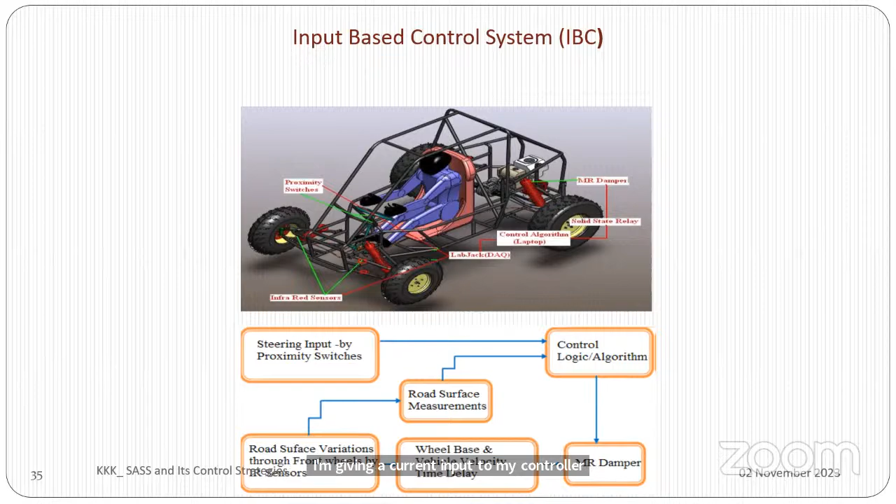So for this one, I have given this bigger table. See this particular table, I will take this one. I will talk about this one. Not the fifth one, I will go to some other point. Yes, I will go to the 9th one.

I am having a bump on the left side and right side. That means I have to give a current input to the left damper and right damper fixed on the rear wheel. But I kept another condition here. Before I showed this table for a half car model, but this is for a full car model, so I have to consider my steering rotation. My steering rotation is minus theta on the right, meaning I am turning my steering wheel to the right. That means I have to give a current input on the left side only.

I am taking an inner turn for your understanding, say an inner left turn. What will happen is the inner tire will go up and the outer side tire gets compressed, so there may be a chance of roll of the vehicle. So as my inner tire is going up while taking an inner left turn, I don't want to allow my vehicle to roll. So what I'm doing is giving a current input to the damper fixed on the right side.

I am talking about this extended controller, and there are other controllers too, but this specific forum is not focusing on that particular thing. I'm just throwing in some information.

While you are walking, your original leg gives a small amount of cushioning effect. If you use an artificial leg, it will not give that cushioning effect. That's the reason it has been fixed with a small kind of MR damper, so you feel like you are walking with your original limb, not an artificial one.

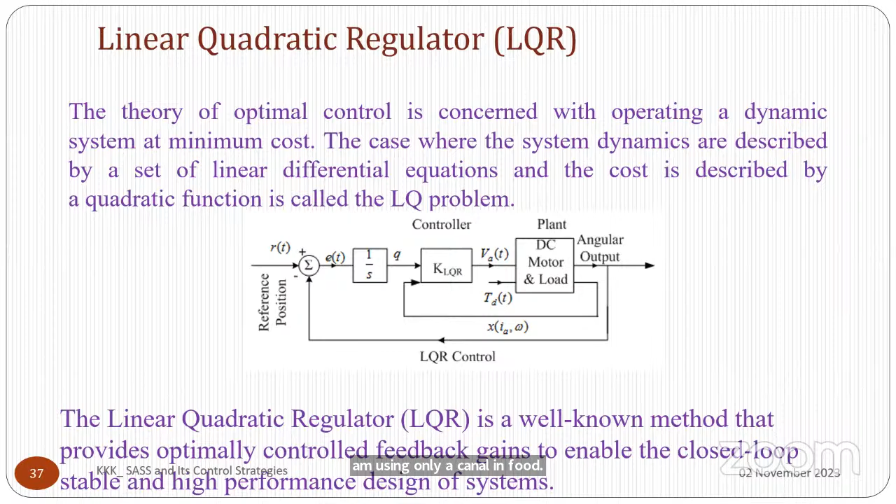This is the second one. And the third one is the PID controller. You know this one: proportional gain, integral, and another one is the derivative. So I am having three components here.

So this is a suspension system model. I am looking for four components. Why am I using a suspension system? To reduce the vibration. But where am I measuring the four components? What are the four components I am measuring?

I am measuring the car body displacement, which is nothing but the sprung mass displacement, that is the X value. Next one is the car body acceleration, that means the sprung mass acceleration, X double dot. Third one is the suspension travel.

This is nothing but x1 minus x2. Normally, automotive people call this the rattle space displacement. Next one is the amount of wheel travel. So I tune these values.

I continuously do this normally on an error and trial basis only, because this is how people still get knowledge of what value I have to get. So I'm doing the error and trial method, I do all the things, then finally I get the final output.

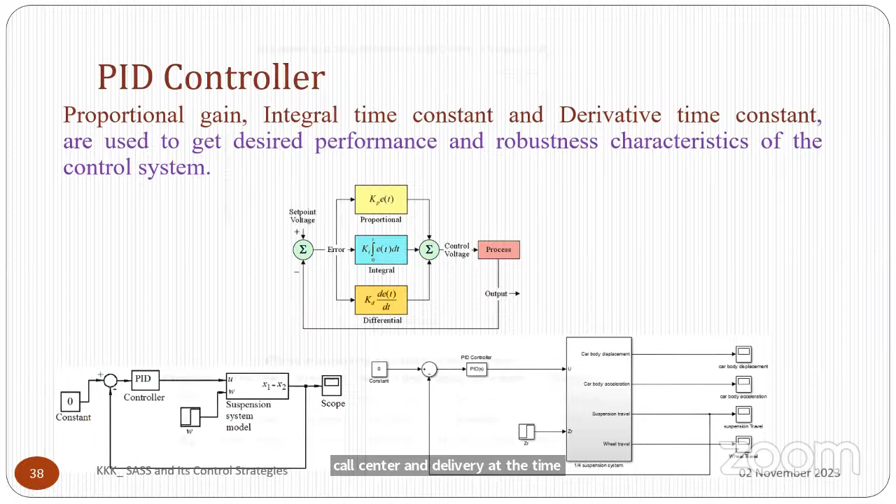So if I'm using this kind of controller, I do tuning, like in an IC engine we tune injection timing, crank angle and spark timing. We are tuning these three components: proportional component gain, integral time constant, and derivative time constant. We do fine tuning and get the final output, the estimated output we are looking for.

And this one is for people who have expertise in material science. These are various models we are using: one is a model with some description and examples. One is called a quasi-static model, where this model is based on the Bingham plastic model, which was the first model invented.

Slowly what happened is this model has been kept in deeper research, and every time it has been modified, so we have a lot of models. One is the modified Bingham model, and there's a biviscous model, viscoelastic plastic model, stiffness viscosity elastoslide model, and the Bouc-Wen model. This Bouc-Wen model is extensively used, and sometimes we use a hyperbolic tangent model.

Equivalent models are also used. While we are doing a simulation, we use these various models and we can finalize. There is always a trade-off between one model and another, between one system and another system, but our objective is to get an optimum performance of the system. So which optimum are we looking for, right?

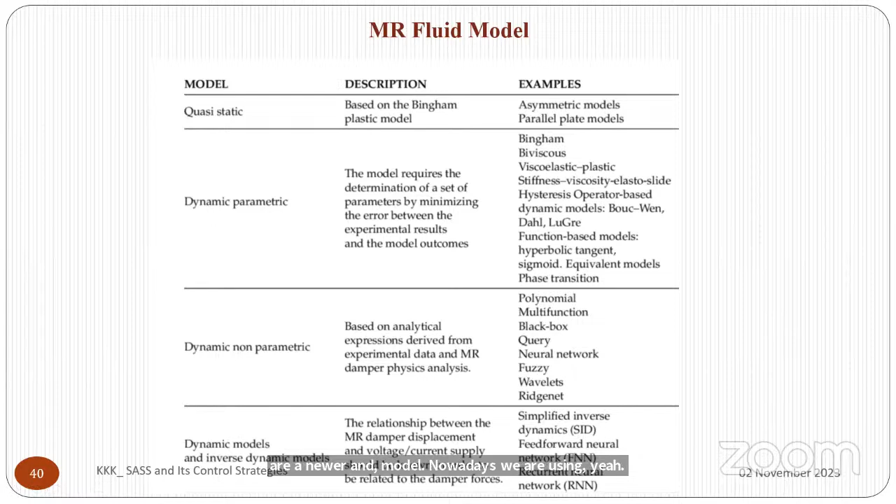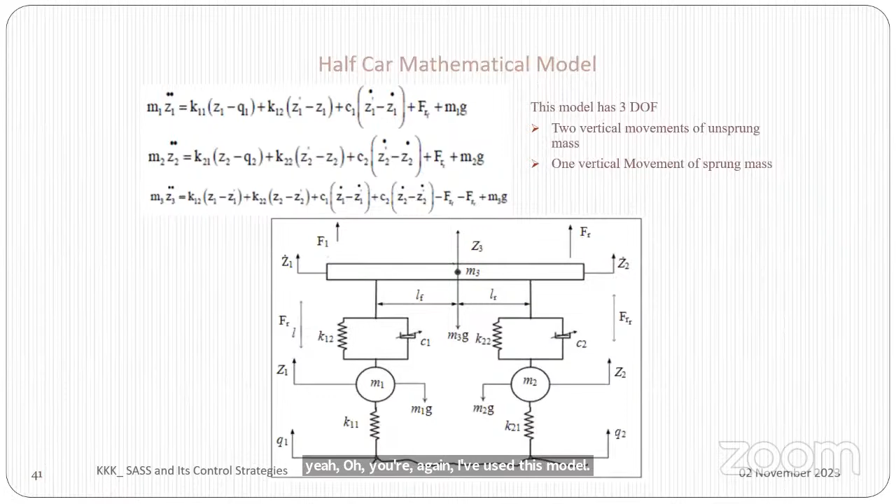So again, if I use this model, all these models are used in MATLAB. I put this equation and I get the final output, right? And this is a physical half car model, I have explained previously. This is half car model testing. These are some values I got from that particular thing, right?

With this, I can stop. If you are having any query, let us discuss. With this, I can stop it, right? Thank you.

Dr. Francis. Yeah, thank you, sir. There are a few questions asked by people. Maybe one question is from somebody else, Shashikant Koilkar.

Is the damper temperature rise also a major issue? Yes, every damper, right? The Department of Transportation US brake fluid they're using for Formula racing - they use a DOT 5 fluid because every time you are pressing a brake, it's getting 500 to 600 degree temperature. This damper normally has a fluid. If temperature increases, there is something called viscosity index, we have already studied. When temperature rises, density reduces. If density reduces, what will happen?

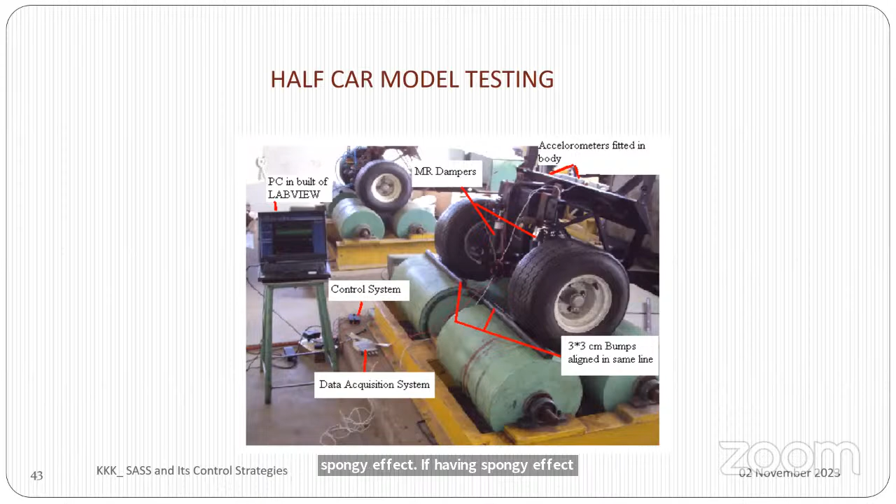You will get a spongy effect. If you have a spongy effect, it means your damper acts as a soft suspension system. That means you will get only ride comfort, you will not get vehicle handling. But while you are taking a turn, there is something called DLC and SLC - SLC is single lane change, DLC is double lane change. Simply put, you are overtaking one vehicle, or overtaking two vehicles simultaneously. During that time, what happens if your fluid becomes very soft? That means it will not support vehicle handling. So temperature variation is very, very important.

People in this group who are interested in doing CFD analysis, think about fluid flow analysis in the damper with variation in temperature, right? You can use COMSOL software - COMSOL is one of the finest software, you can use it and get output, right? Yes, normally above 80 degrees, Shashi, it is normally above 80 degrees, right? Any questions? Yes, dear participants, you can unmute yourself and raise your queries.

Sir, I'm Srinivasan. Yes, Srini, please tell me. Sir, you are either going to switch off or switch on with the 2 amperes with your damper. Why don't you use the middle values? Because as you said, more damping means more power loss, so why don't we use these middle values?